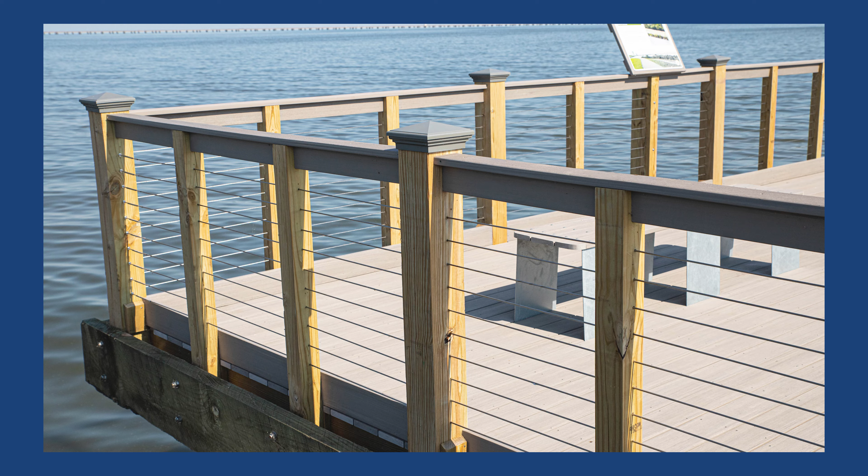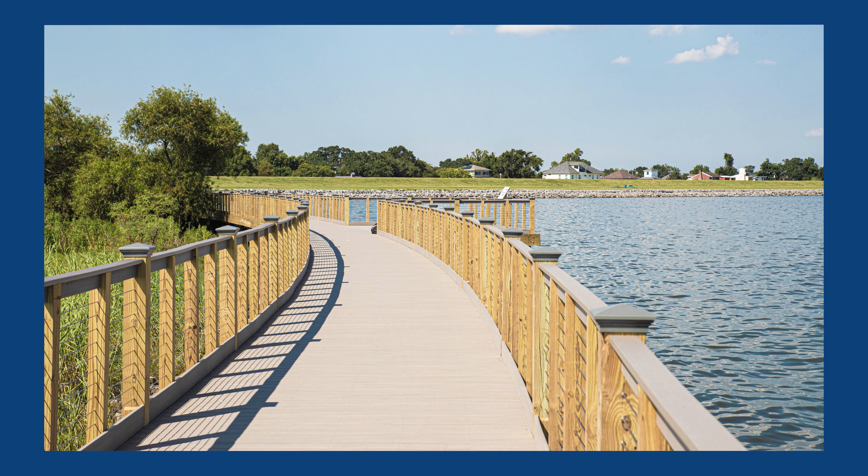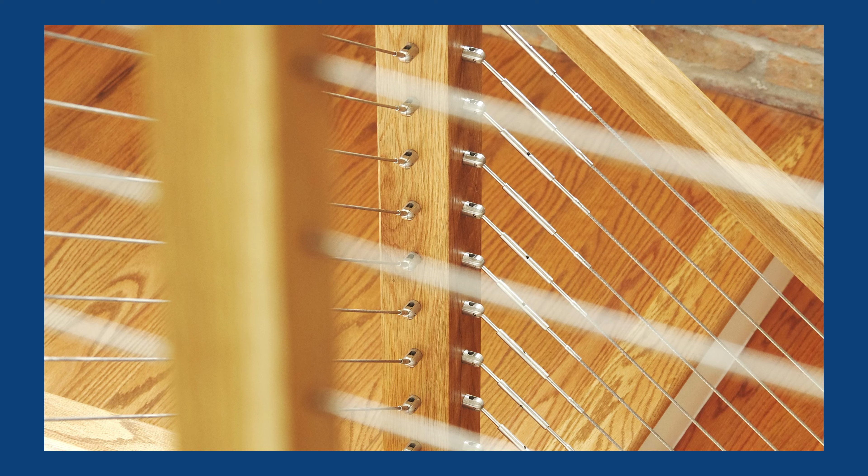Cable railing is an alternative form of fall protection used in place of traditional wood or metal balusters. Cable railing systems consist of several tensioned stainless steel cables suspended between the post and a handrail. Many choose cable railing over traditional fall protection systems for their decks or staircases due to its minimalism, updated aesthetics, and it typically being more cost-effective. If you're looking for a minimalistic, low-maintenance, and cost-effective option for your balustrade, cable railing is an excellent choice.

When installing a cable railing system, it's really important to consider the type of post and handrails where the cable railing will be installed. Cable railing can be adapted to many new or existing post and handrail constructions, whether it be all wood post, metal post, or a combination of the two.

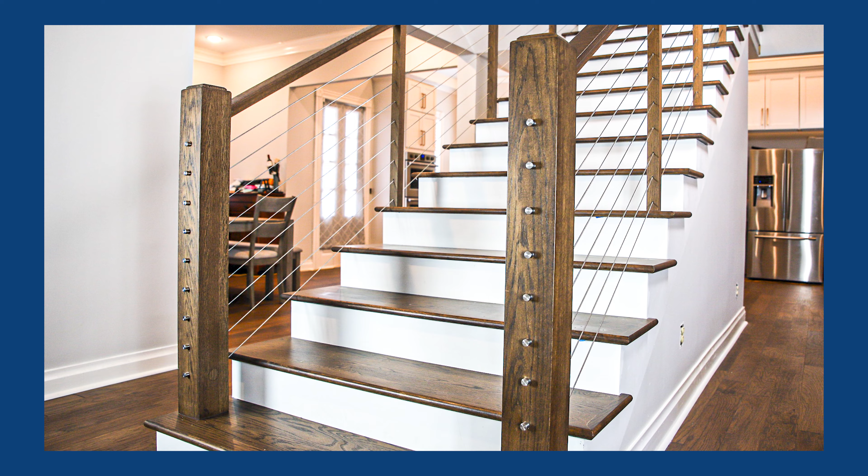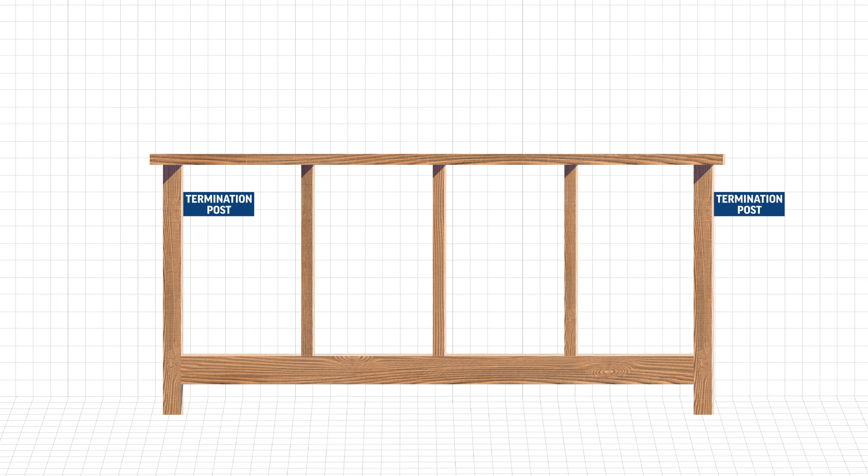Whatever type of post and handrail construction you're installing cable railing on, you will always have these parts of the system to consider. Termination posts refer to either the end or corner posts that each end of your cable will attach to, intermediate posts that support the cable over the distance it's traveling, and the top rail or handrail, which is required for any deck or staircase.

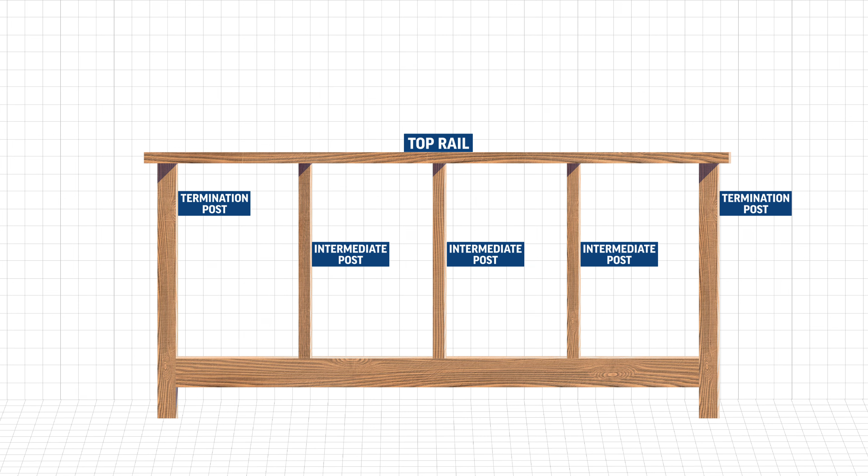Apart from your post and handrails, a cable railing system is of course composed of cable and components. So first, let's talk about the cable. The two most common cable diameters are 1/8 inch and 3/16 inch.

Choosing between the two is really based on how you would like your system to look. 1/8 inch cable is the most minimal option. It's great for residential applications and does an awesome job of exposing your view. 3/16 inch offers a more substantial, industrial type look and is popular for both residential and commercial applications.

Apart from cable diameter, cable construction is something that you'll run across. The industry standard cable construction for cable railing is 1x19, since it cuts cleanly and is a very straight running, low stretch cable.

You'll notice in a lot of our videos that we use the word component to refer to the different parts that connect to each end of the cable. So the first component we're going to talk about is an end stop. The end stop's job is to secure one end of the cable at a termination post.

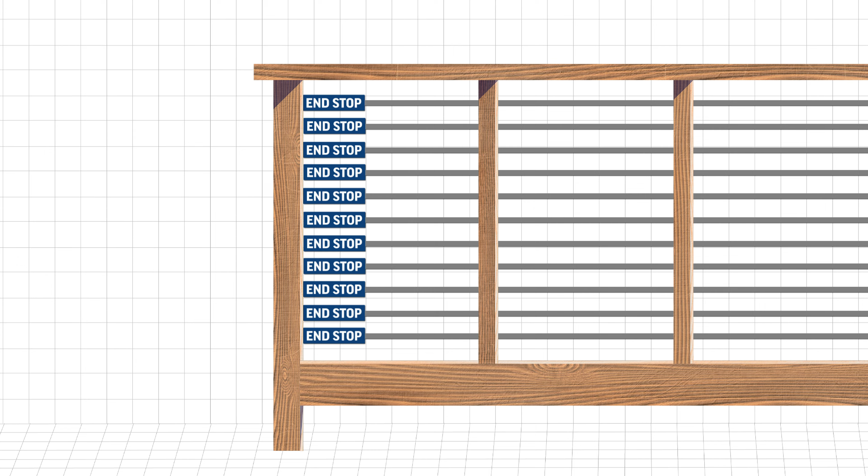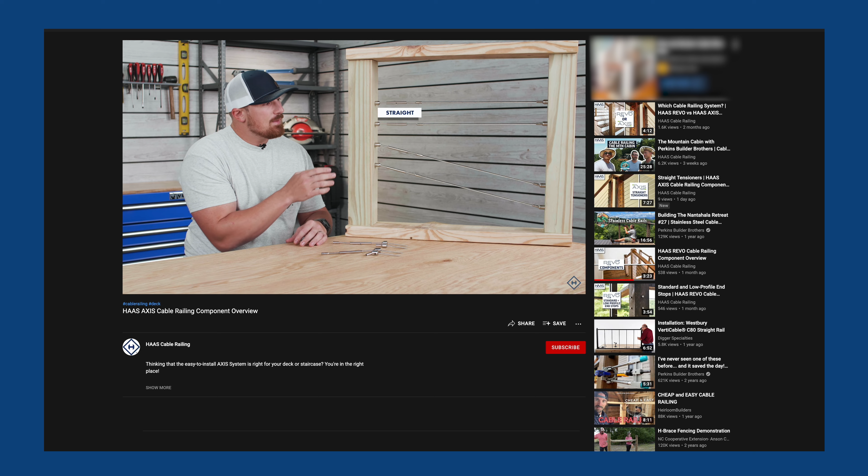Opposite of the end stop, you have tensioners. These components tighten the cables. End stops and tensioners both come in through-post and lag styles and will each be used for specific post scenarios. If you'd like to learn more about these types of components, check out our cable railing component overview videos where we go a little deeper on through-post and lag styles.

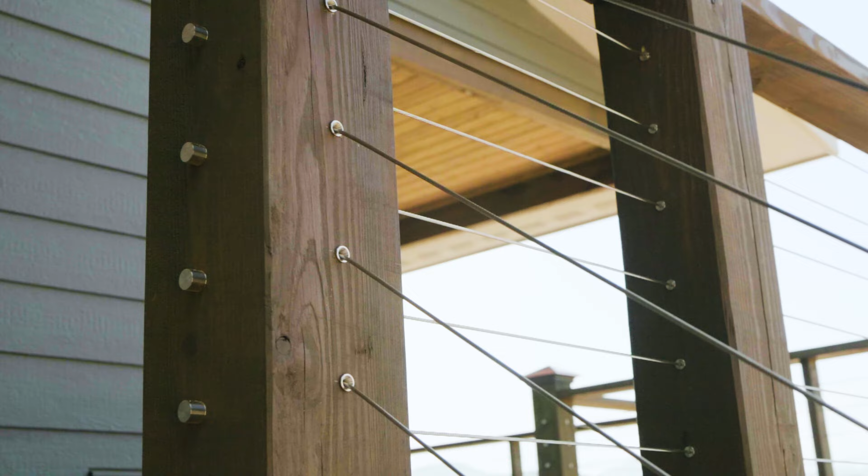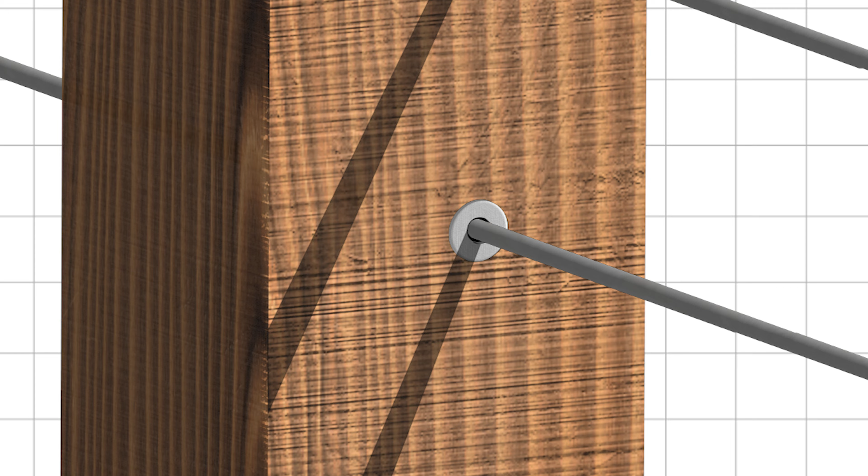The last component we'll talk about is wood post protectors. Wood post protectors are primarily used in your intermediate post and sometimes termination post. They're designed to give your system a finished look, and they also protect your post from cable abrasion. While they are optional, we strongly recommend including them into your design to keep your railing looking great for years to come.

You might be asking yourself, how do all of these components connect to my cable? While the wood post protectors simply slide onto your cable during installation, the tensioning and end stop fittings will be permanently connected to each end of the cable through a process called swaging, which is basically a fancy word for crimping. Swaging your tensioning and end stop fittings is done with a tool called a swager.

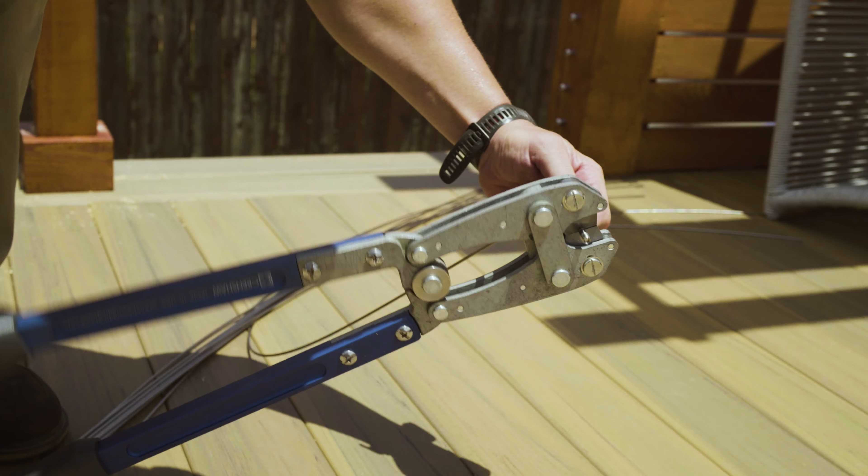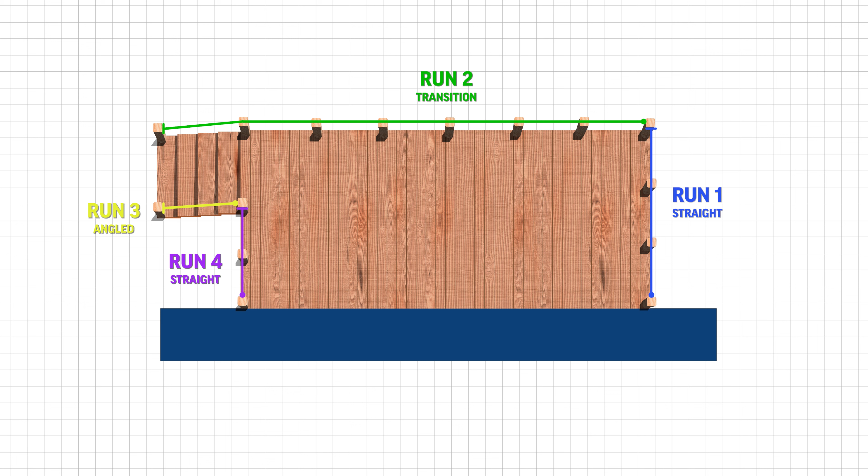A cable railing system is made up of one or more segments called cable runs. Each run will consist of rows of tension cables that are secured at one end by end stops and tensioned at the other end by tensioners. In most cases, only one side of the run will need tensioners.

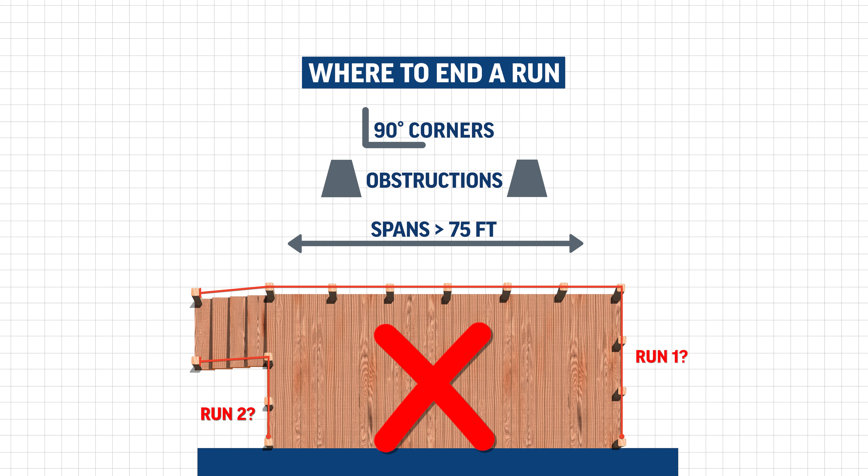It's easy to forget that cable rail systems are not continuous. A cable rail system will be broken into runs by factors like 90-degree corners, obstructions like walls or columns, or runs that span more than 75 feet. There are, however, exceptions to these factors in special cases.

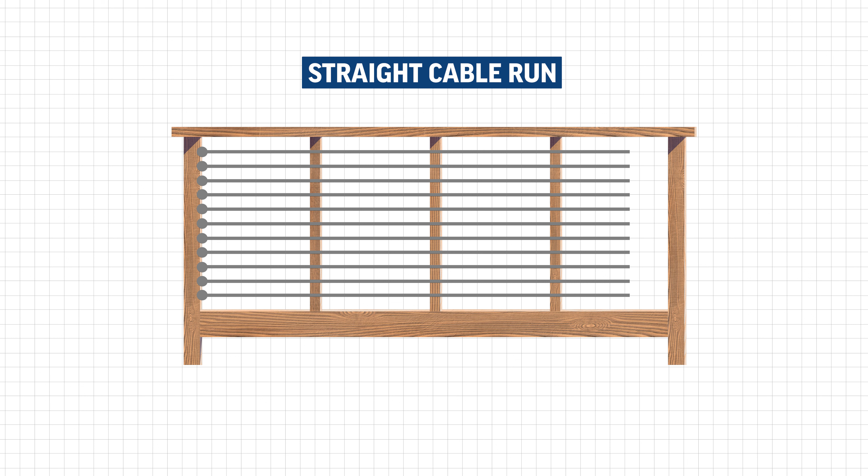When planning out a cable railing system, one of the first things you'll need to do is identify the different types of cable runs that you have. A straight cable run is a type of run where your cable and components will be running straight or perpendicular to both your termination and intermediate posts.

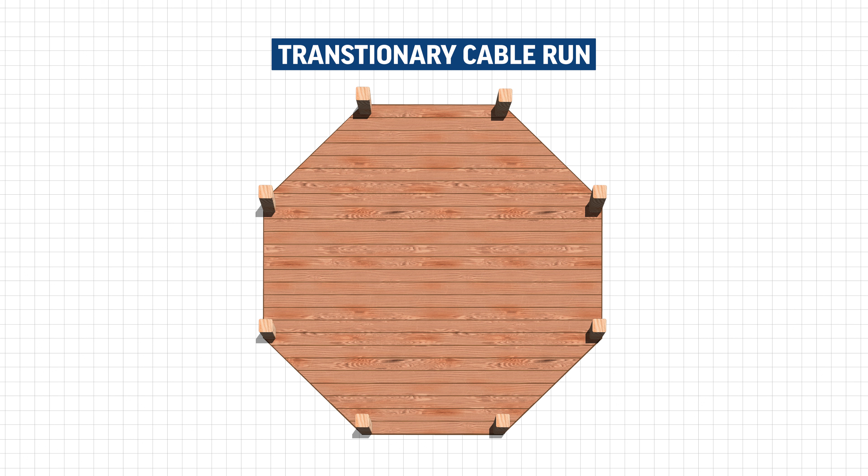Angled cable runs are typically found on a staircase, where your cable and components will be running at a consistent angle from one termination post to another. The last run we're going to talk about is a transitionary run, meaning the run starts off at one angle and changes angles at an intermediate post between your termination posts.

A transitionary run can transition at a horizontal angle like this octagonal deck, or transition vertically like this staircase with a landing. Being able to identify each of these runs in your project will be the first step in planning out your own custom cable railing system.

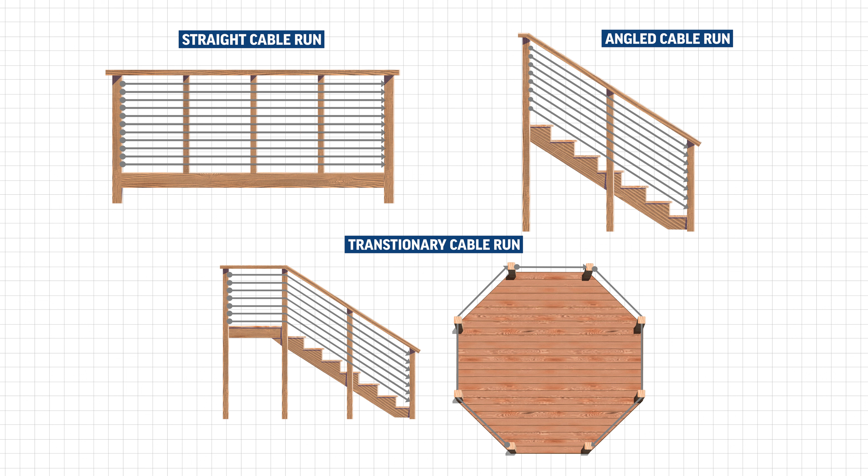At HAAS Stainless, we design and manufacture two different cable railing systems in-house, the HAAS REVO system and the HAAS AXIS system. We're here to help walk you through the ins and outs of installing your own cable railing system.